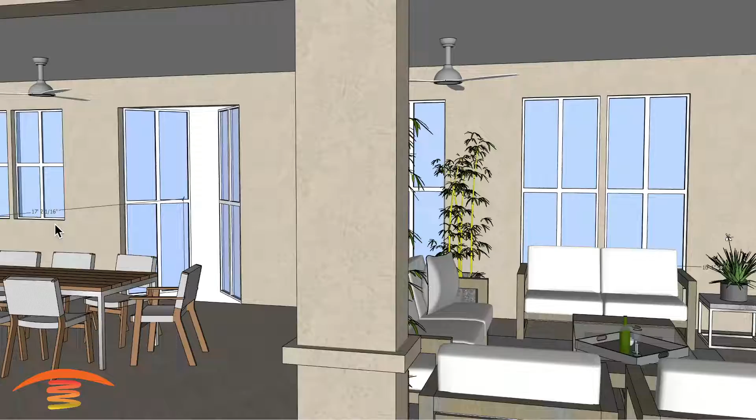Now let's get heating. All right, so here we have this covered patio area, and let's go ahead and look at the overall dimensions first of all. So overall dimensions I have here at 40 feet 4 inches, and that would be from the left wall to the right wall here, and also 17 feet 2 inches, and that would be from the inside pillar here to the wall on this side.

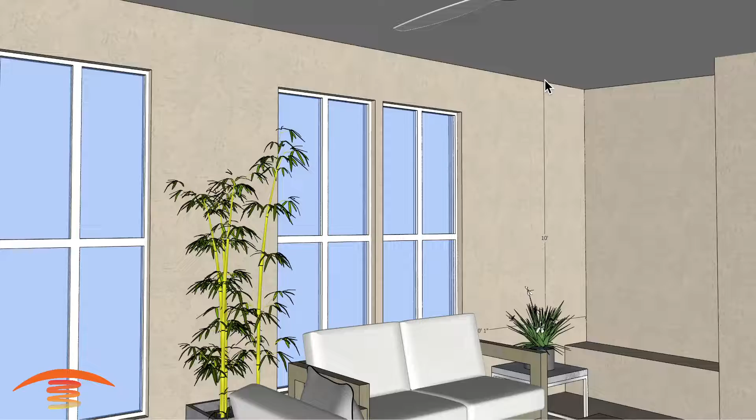And let's look at the different elevations we have. So the ceiling elevation we have here is at 10 feet, and then it drops down to approximately 9 feet off the finished floor. Now I'm not quite sure how high this edge is over here, but I do have it a little bit higher over here, so I'm not quite sure if that's going to have any issue whatsoever, but just so you know, there's a little bit of a question mark there.

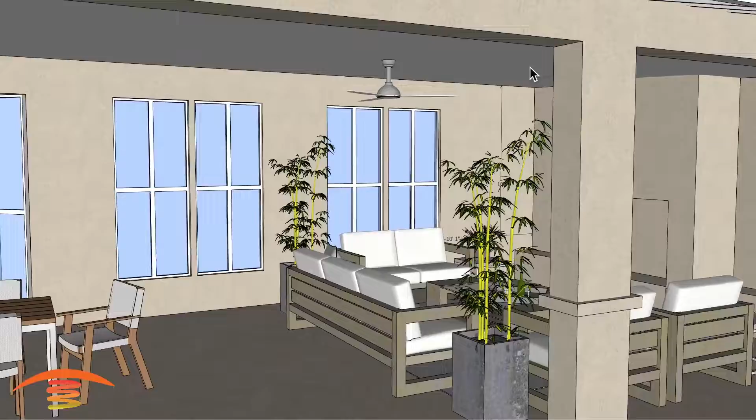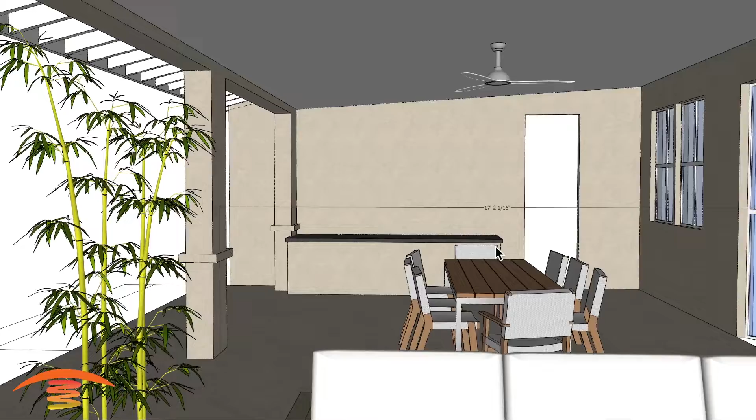There are two fans. I have them centered within the pillar itself, this one and this one, and then centered within the 17-foot section here of the area.

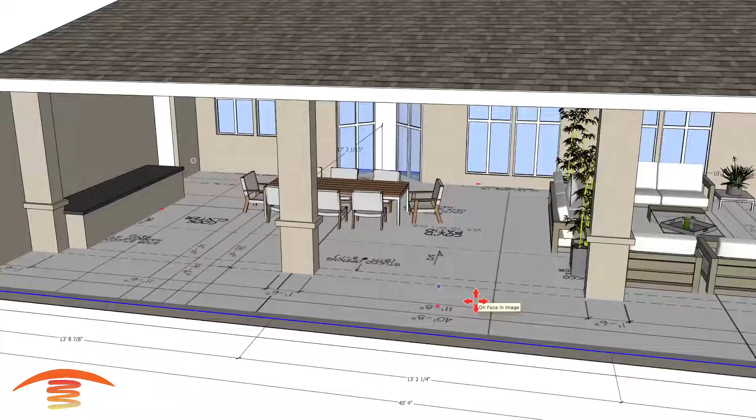Just so you can see, we do have the floor plan, and essentially I've made the floor plan. Let's see if I can raise this up here a little bit, just so you can see it. So you can see the floor plan is pretty much equal to the entire layout here, and also we do have the elevation I have here in the rear. I think that's pretty much about it.

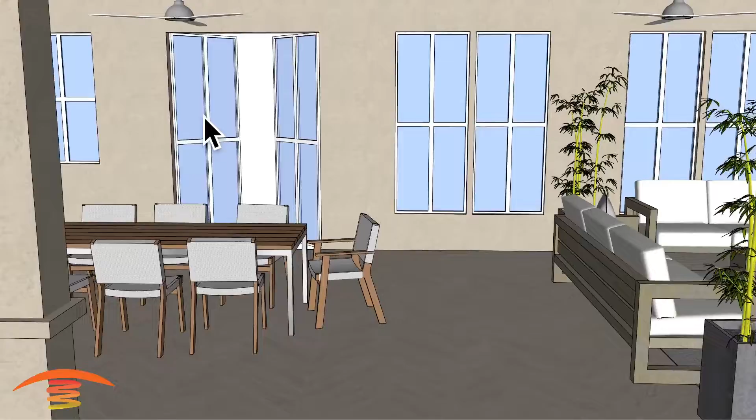Let's go ahead and turn off the dimensions and the floor plan as well. Another thing we should mention is that these doors I have here, they swing into the residence themselves. And then so we have a seating area over here, and the seating area is just my interpretation of what it might look like. And then I have a little dining space over here. There's a cooking area over here, and yeah, that's about it.

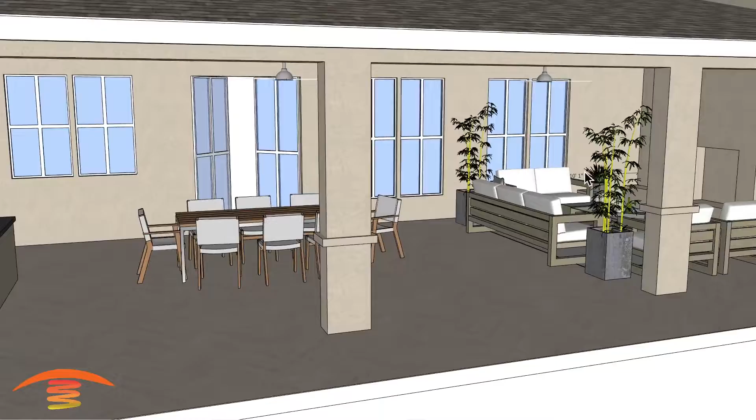So let's go ahead and look at the different options. First of all, I just want to mention that it is a slope ceiling, and the manufacturer does state that slope ceilings cannot have recessed units in there. So if we had a flat ceiling, a recessed unit would work out perfectly. However, it is sloped, so we cannot do that.

So let's go ahead and look at where we might place some units. And the first one I would recommend would be possibly using 6 of the C4024s. So these are 4,000 watt, 240 volt units, correct?

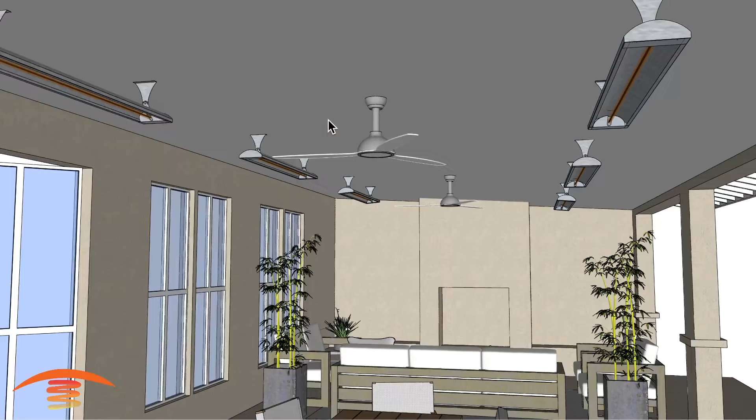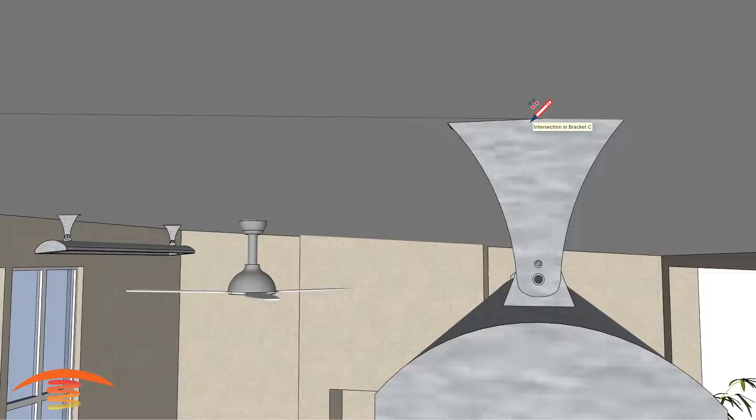And also just to see the spacing I have between them, let's go ahead and mark this up here. So between each unit, we'll go from the middle of the bracket to the middle of the bracket here again. If I can grab that here. I believe that's about the middle right here. So yeah, it should be correct. So we're probably, yeah, there we go, 9 feet center to center.

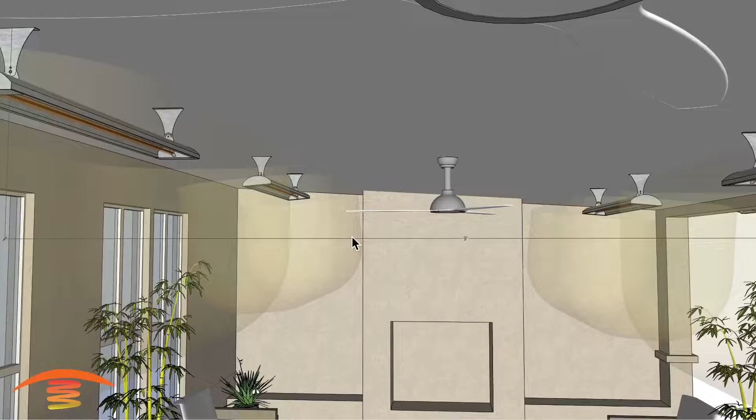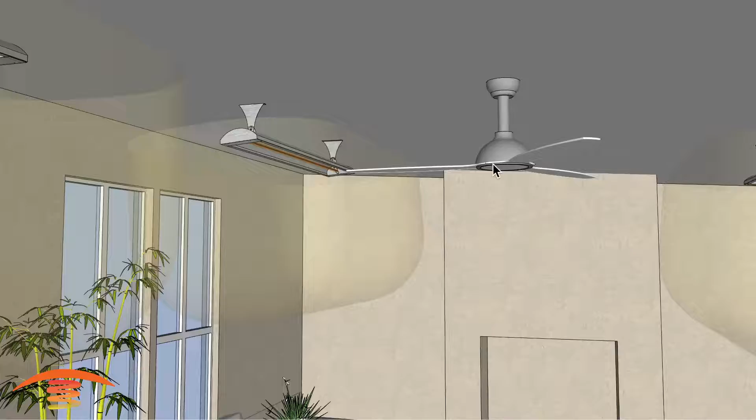There is a clearance issue that we need to maintain, and that would be around the fans. And at this 9-foot distance apart from each other, the clearances should have no issue whatsoever. I didn't mark what the diameter of the fan is, but I believe this is a 4-foot diameter fan, so that should not be any issue whatsoever.

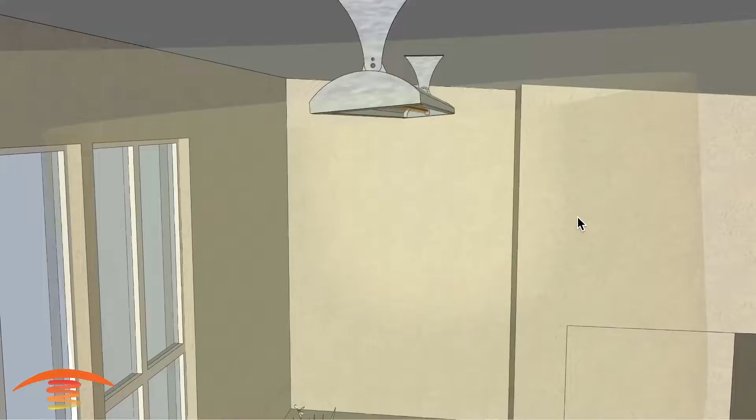Let's see if there's anything else. Also, the units over here, on the right by the seating position, I have these at a slight angle, 5 degrees tilted in towards the center, and that's because of the seating position here, and we'll look at that in just a second about the footprint of heat.

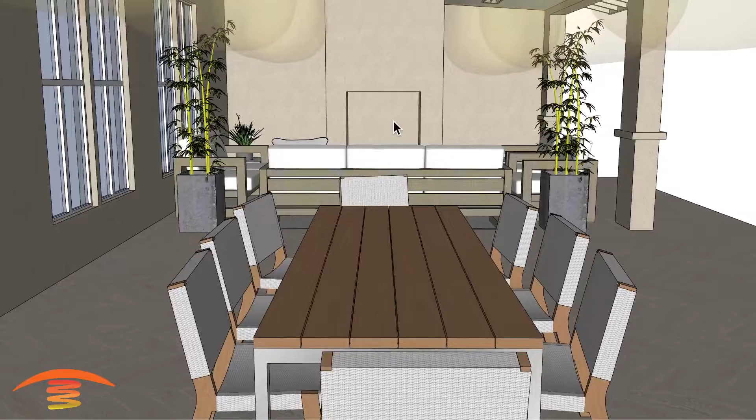The units over here, I have them straight down because of the fact that most of the area that you're going to be occupying, and I have the table in the center of the location here, but most of the area that you can occupy is going to be on the outer side of the table, so we're going to try not to heat up the table itself for any reason. And I think that's about it.

So let's go ahead and look at the footprint of heat. You can see that we're covering the area fairly decently.

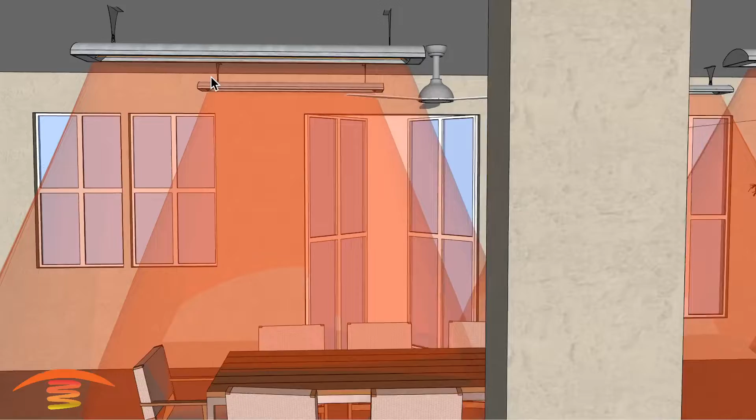Another dimension I should also put in here is the distance between each unit. And let's see if we can grab that. I think it's around 10 feet if I'm not mistaken. But let's grab that here real quick.

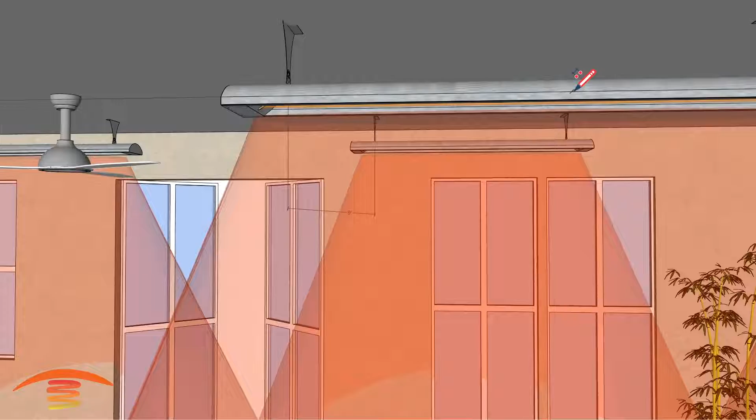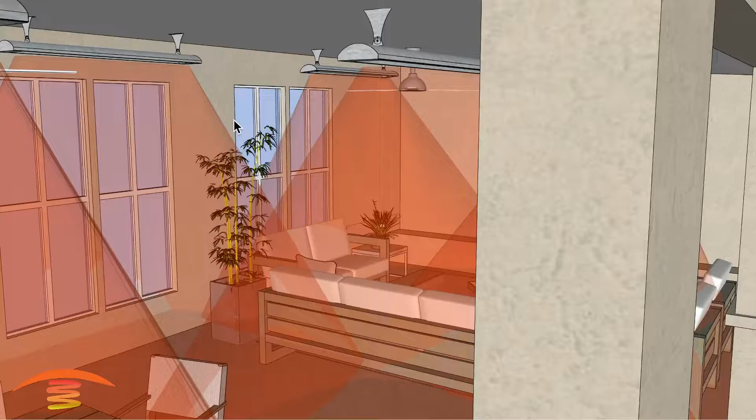Sometimes it's a little difficult to grab this properly, but that's actually 10 feet center to center. I know I don't have that shown properly, it didn't grab that position the way I want it to, so let's go ahead and delete that for right now, and we'll take that out as well.

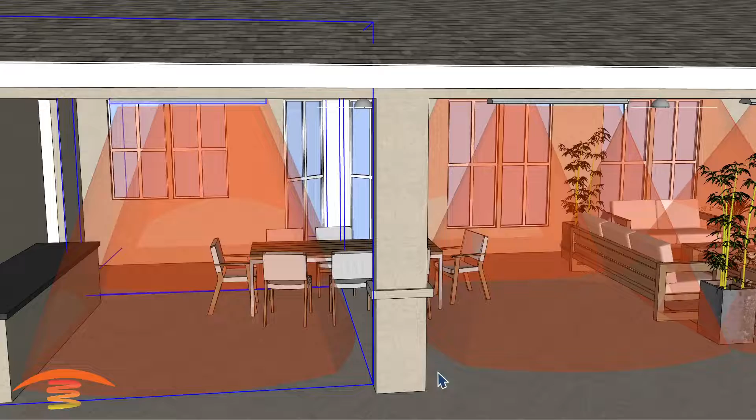So yeah, 10 foot center to center. I know that's going to be off center as far as this opening is concerned, but if we were to move these two units over so they're more centrally located within this opening, we're not going to get good coverage in the middle at all, and the same would be true with this area over here. That's why I have them at that 10 foot center to center, and obviously we're not heating up this section here, nor this section over here.

All right, so that is how 6 of the C4024s would look. Let's go ahead and look at a different option.

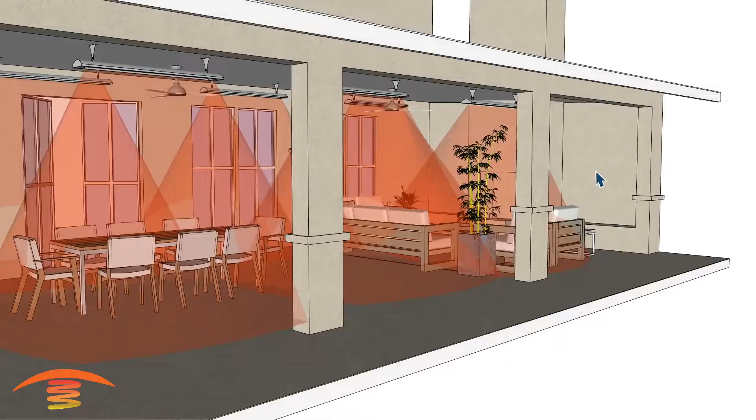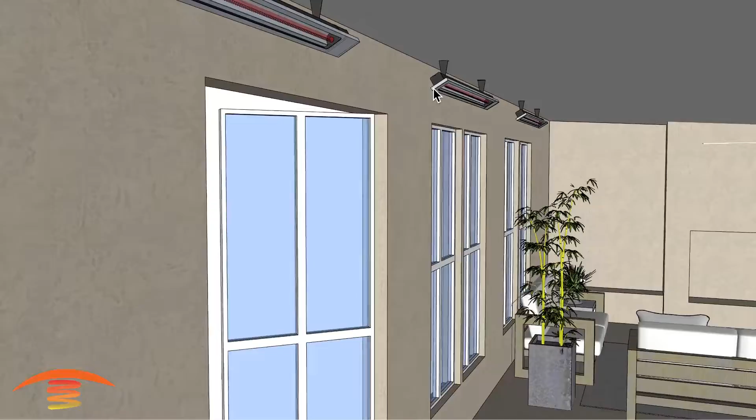That different option would be to place some slimline units in, and I have them up against the wall. Now, the reason I don't place the C series up against the wall is the manufacturer does state that if it's over 30-degree tilt, it needs to have a 12-inch clearance.

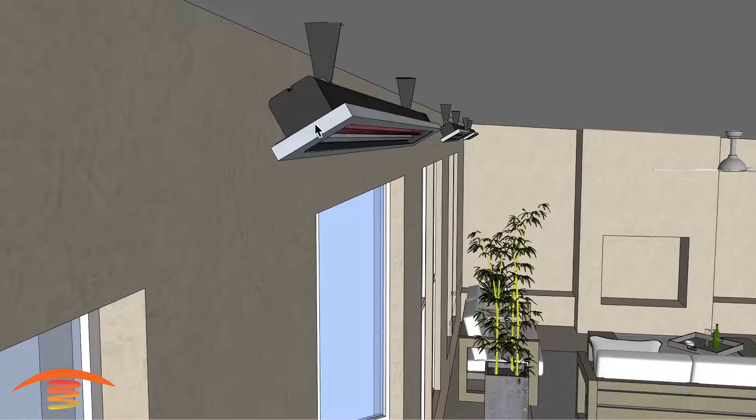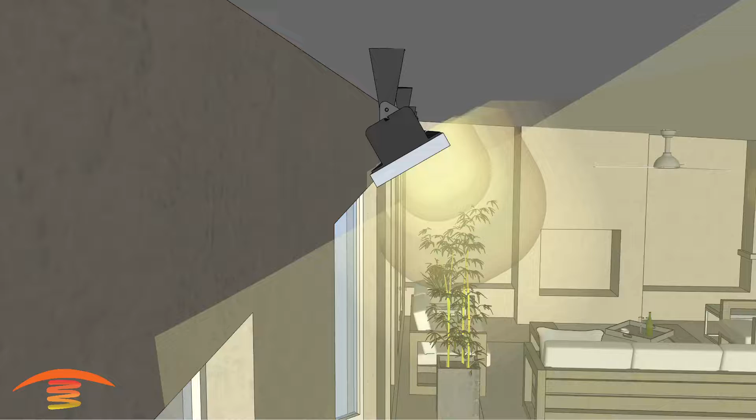The slimline series, I have it up on the ceiling at a 30-degree angle towards the seating positions, and with that we only need 6 inches of clearance around the top of the unit at that 30-degree angle. So that is why I'm choosing the slimline for this particular application.

So these are centered, located within the overall distance, and then again 10 foot center to center on each unit.

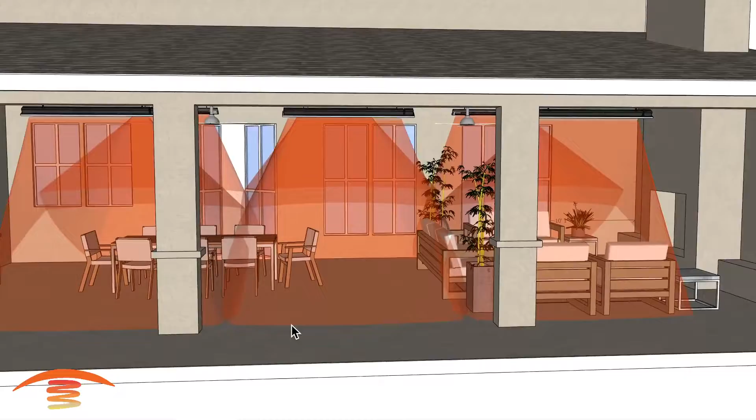And let's go ahead and look at the footprint of heat. You can see that we have a very nice overlapping ray in the center here, and here you can just see the throw of heat from that exterior wall.

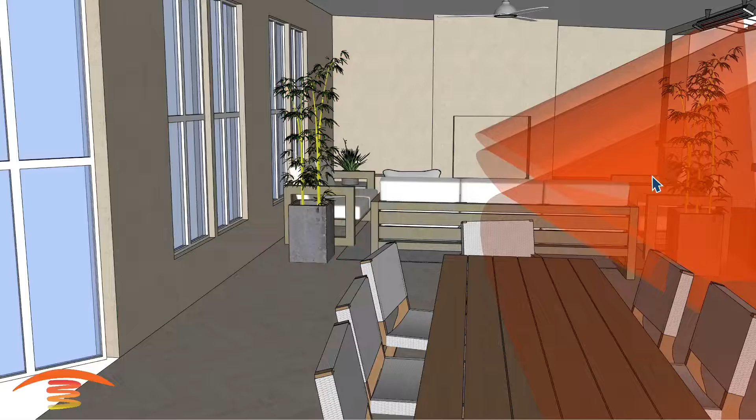So let's just do this for a second. I'm going to go ahead and delete this unit here, and this one, and this one. So if we just had units over here on this edge, we're not going to really be heating up half of the patio. It's pretty much going to be a maximum of 8 foot from this edge in towards the center that you'd be comfortable with.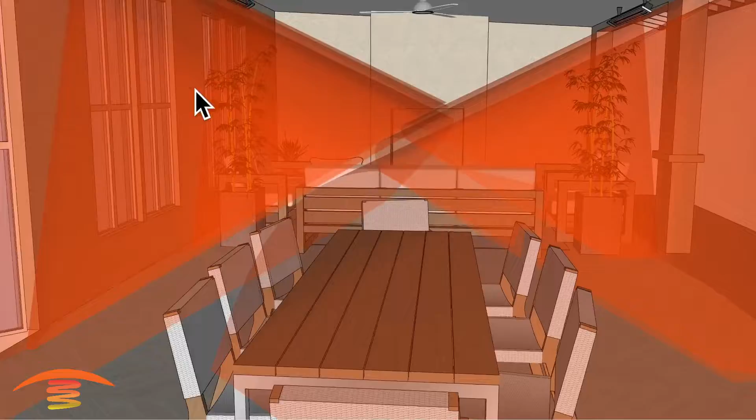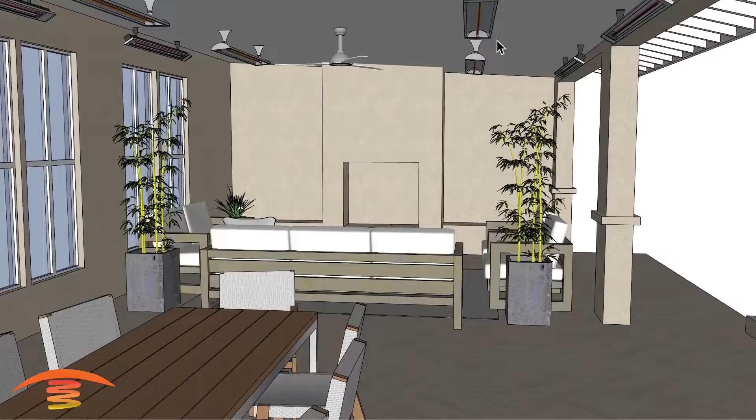So that's why I'm showing the additional 3 units here as well. I think this is going to be a nicer application for this overall area, just because placing the units in the center, as I showed before, and I'll go ahead and show that here again. Having the units in the center, I'm not quite sure I really like that idea as much, just because it's taking up some of the ceiling space.

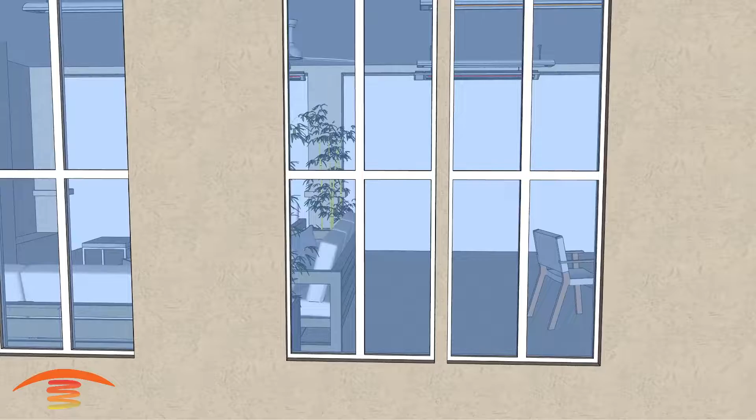So let's go ahead and look at it from this vantage point, looking out the window here. I'm going to go ahead and turn off the C series for a minute, and you can see that this is how that would appear.

And again, going back to the statement I made about this height, if this height is a little bit higher, then it probably won't stand out as much. So let's go ahead and look at what that height actually is that I have here.

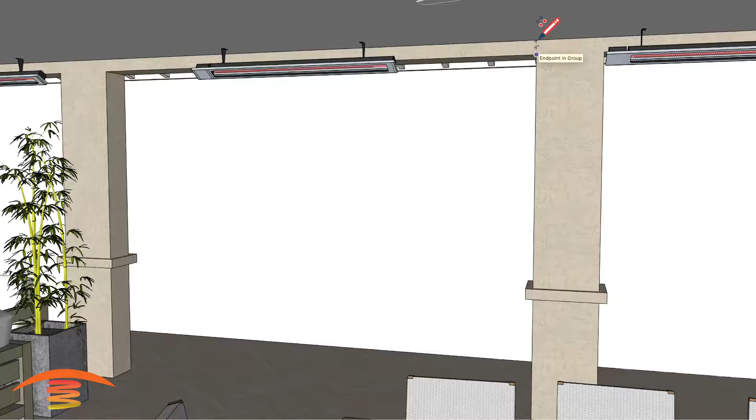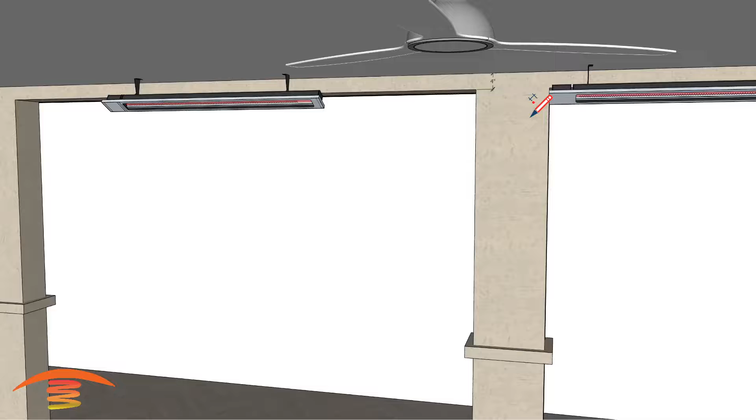So yeah, we've got about 4 inches of height here. Let me just double check that - yeah, 4 inches of height here. And if it's higher than 9 inches, that's about the bottom edge of this, 9.5 inches actually from here to here, I think. Let's go ahead and look at that as well.

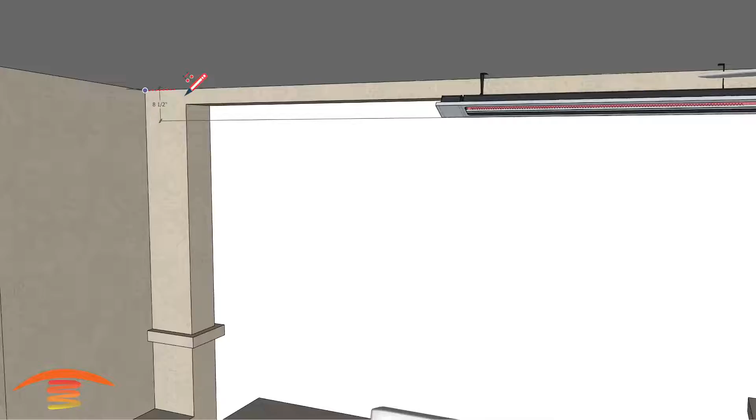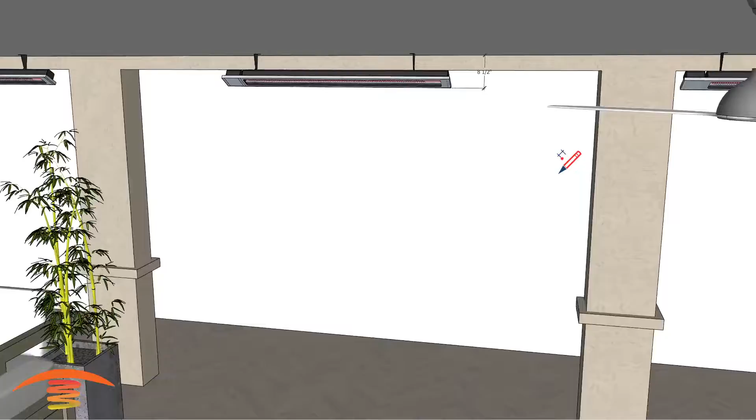So actually we have 8.5 inches, if I have that correct. So in any case, that's what this would look like from this vantage point.

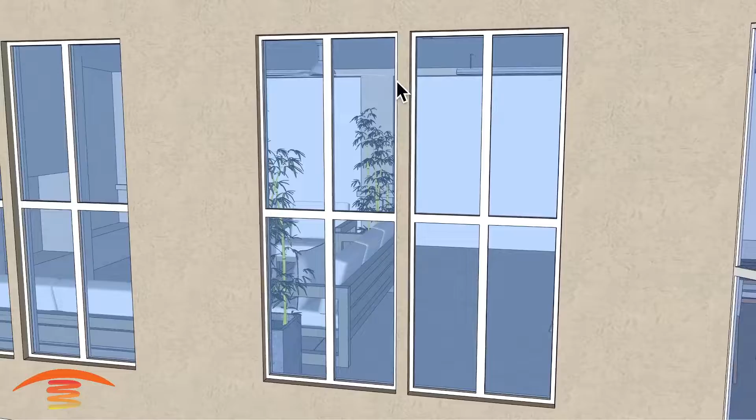And then also, if we were to look at the slimline units, or sorry, I mean the C series models, those would also kind of stand out a little bit in the center of the ceiling space. So I prefer probably the slimline best, but I think actually, as far as the footprint of heat, this would give a more uniform amount of heat, because the rays are pretty much going straight down and heating up the space uniformly throughout the whole space.

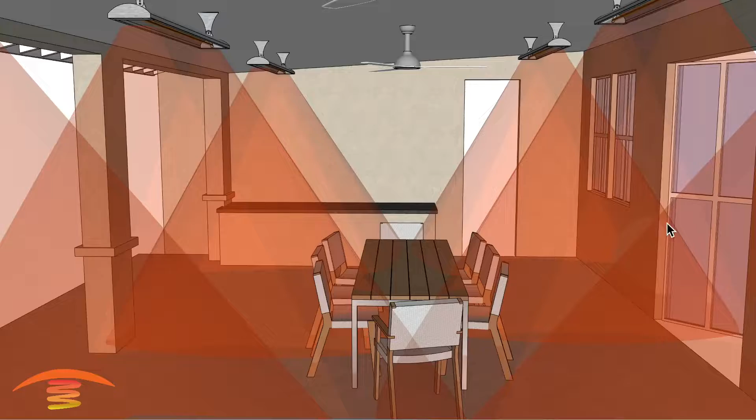So all right, well, I hope this has helped. If you're looking for some assistance with your outdoor heating application and you would like us to review your plans, please send your information in.